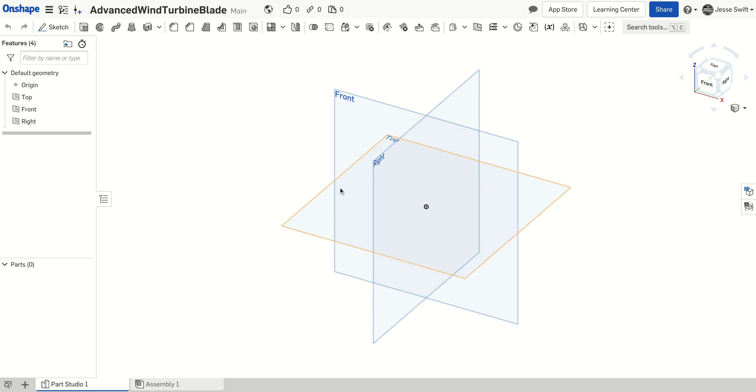Using my sketch from earlier in my brainstorm, I'm going to design a wind turbine blade that is around 200 millimeters long. Now, when you start drawing in Onshape, you'll click sketch, and it wants to know what plane you'd like to sketch in. Our first plane will be this front plane. We'll click there, and now you'll notice the tools have changed now that I am sketching.

So what we'll do with our advanced wind turbine blade is start with the shaft that will go into the hub on the generator. I'm going to grab my circle tool, and we're going to start that at the origin. I'll click and just draw a circle. Now that it's drawn, we can go through and dimension it accordingly to the size for the hub.

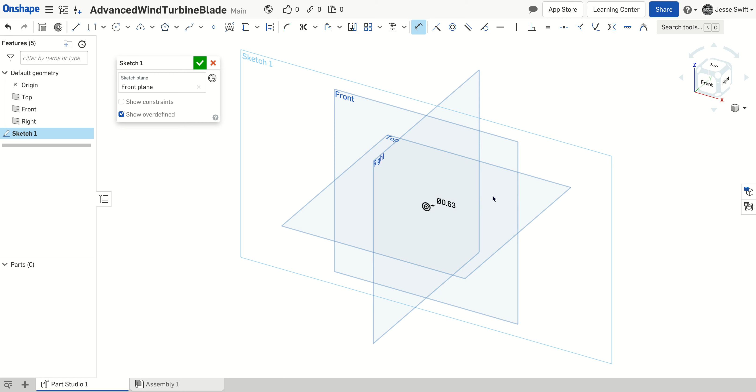It should be around a 1/4 inch dowel that would fit in the hub. So I'll grab my dimension tool up here, and we can make that a 1/4 inch. A 1/4 inch converted into millimeters is 6.3 millimeters, or 0.63 centimeters. So there's our circle for the shaft that will go in the hub.

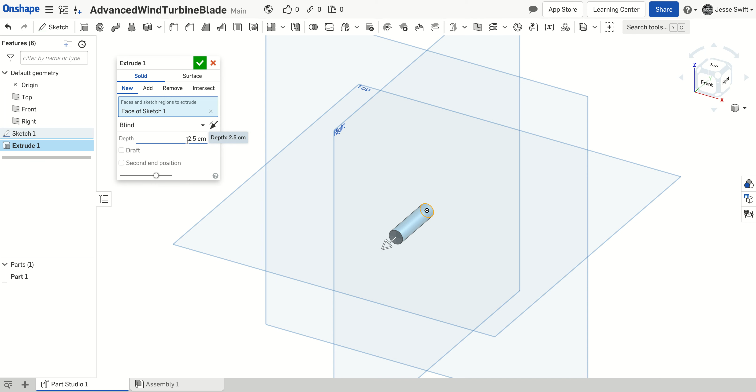Now that I've sketched it, I'm going to click on the green button and say OK. What we can do now is extrude it the distance we need for the shaft. So we're going to use another tool up here called extrude, and we'll click on that face of the circle, and then pick the distance to extrude. It's going to default to extrude 2.5 centimeters, and we'll just change that to 5, and we should get a nice 5 centimeter shaft there.

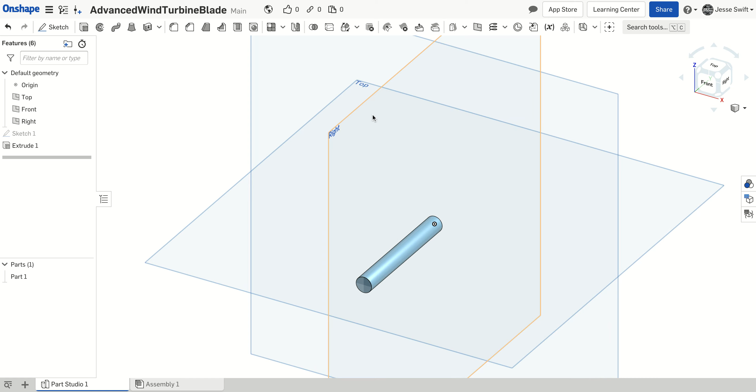All right, now this is one of the advanced functions here. We're going to click OK. Now what we're going to do is draw a profile of the blade that we want. In this profile, we're going to draw about 150 millimeters from our front plane, or 100 millimeters from this surface here.

So we're going to use a tool over here called plane, and what we can do is create a parallel plane to draw from. So we're going to offset the front plane, and we're going to offset that 15 centimeters. You can see out here that new plane has been created. Now that we have that new plane, we're okay with it, we'll click OK. And now we can change our point of view for our drawing surface to the front.

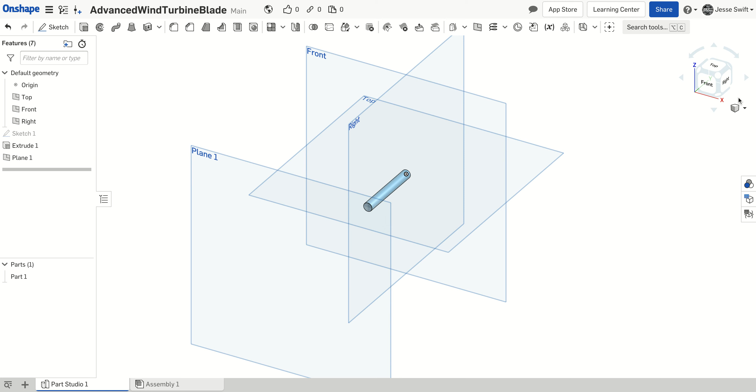You can see here, we can still see our shaft. And what we can do now is draw on this front plane. So I'll click on Sketch, we'll sketch on plane 1, and I'm going to change my view to front. This is where we can sketch this profile of our wind turbine blade. What I'd like to do here is draw some sort of wing shape, some sort of aerodynamic shape.

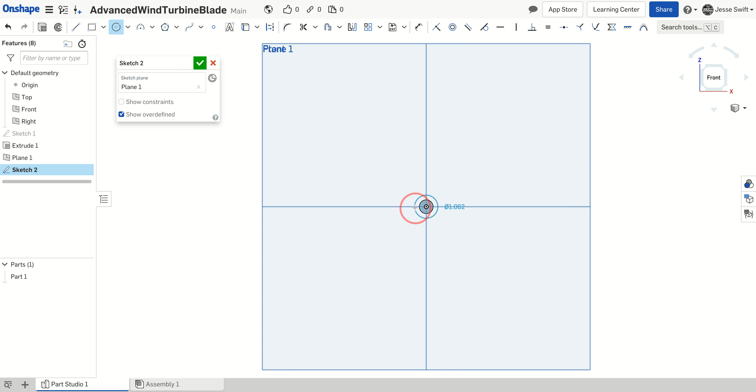So I'm going to grab my circle tool and make a circle just a little bit bigger than what we have currently. I'm going to scroll, zooming in. Now I want to take my spline tool and draw some curves onto this to make it look like an airplane wing. So up here at the top, I'm going to start my curve.

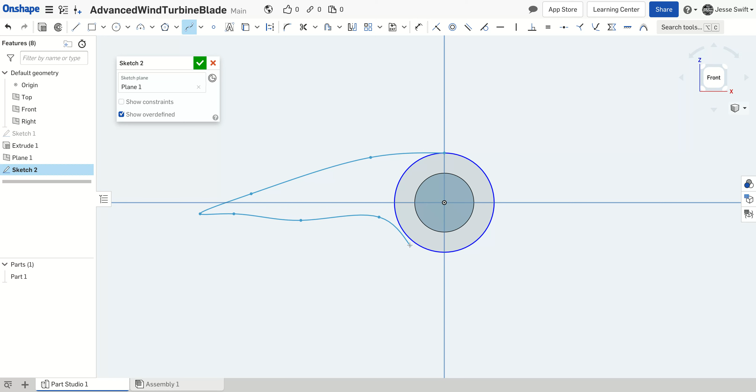I'm going to go out this direction, and then do a few quick lines here, give it a little bit of a cup, and end it tangent to that. So there's our profile that we want. If you're not happy with it, you can click on some of these points and change the shape.

To make it a little more aerodynamic if you like, what we need to do is trim this middle line off the circle. So I'll use the scissor tool and trim away that line. Now that we have that done, we'll click OK.

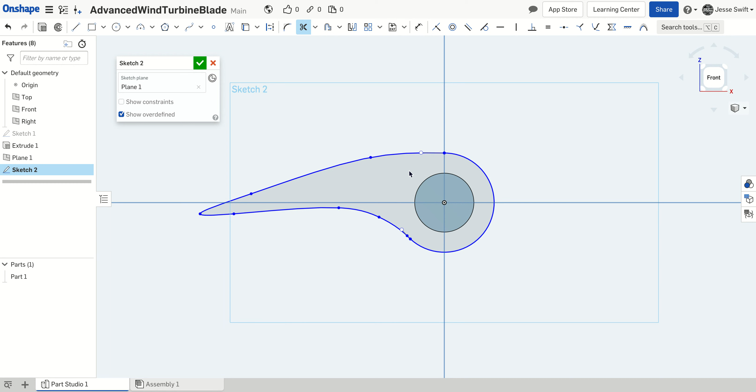Now I'm going to change my view again. I'm going to use this little diamond, and we're going to change it back to isometric.

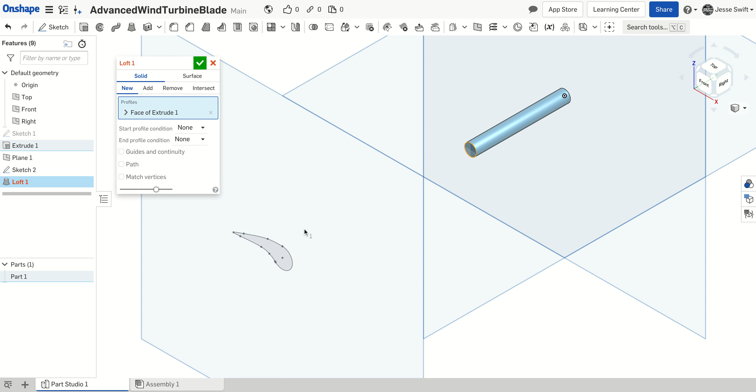Now this is the really cool tool that I'm excited to share with you. This function is called the loft function. What we'll do is click on the profile of the end of the shaft here, and then click on the profile of our wing. It will create that profile to go from a circle to our wing. I'm really happy with that, so I'll click OK, and we can scroll around and look at what that now looks like.

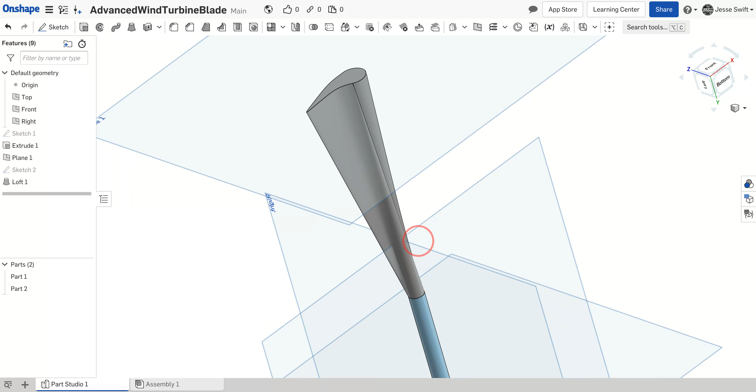So this is definitely a more advanced wind turbine blade. All right, I'm going to change that back to isometric.

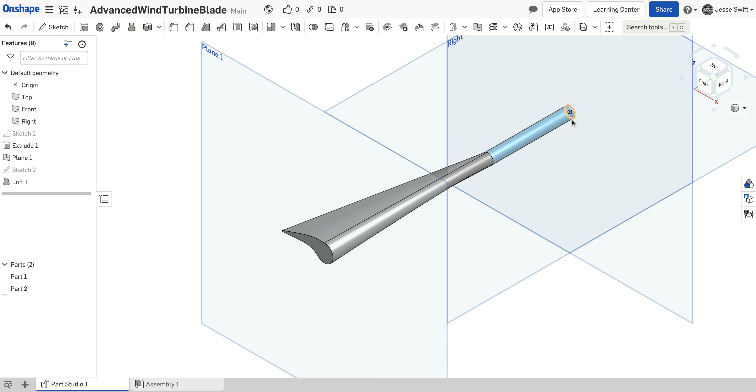Now I need to finish the blade because overall we have 50 millimeters here, we have 100 millimeters here, and I want to create another new plane that's another 50 millimeters from the end. So the overall length of our turbine blade is 200 millimeters.

So I'm going to click on plane, and we're going to offset. We can offset off of plane 1, and offset that 50 millimeters, or 5 centimeters. You can see now we've got that new plane for the end of our turbine blade. We're going to click OK.

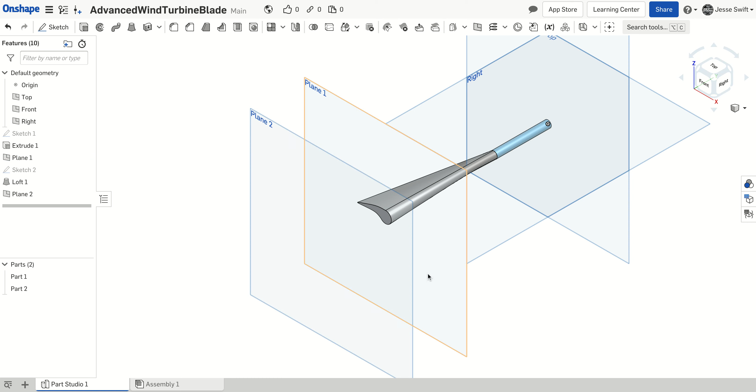I will now go ahead and sketch again in that plane 2. I'm going to change my view to look at the front, and now I'm going to just draw a small circle on that.

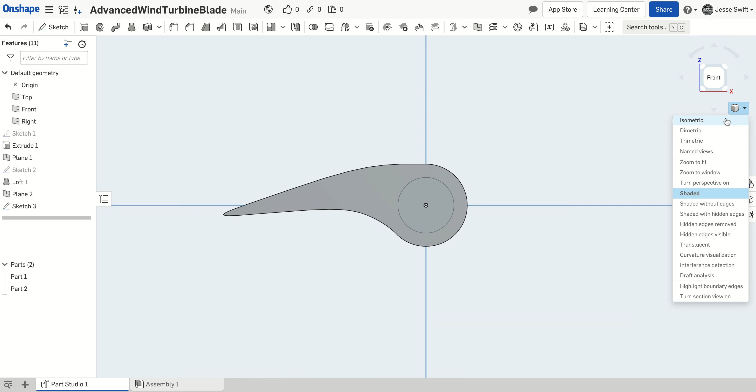And then click OK. From here, what we can do again is use that really cool loft tool, and we can loft from here down to the end of our circle. I kind of recommend ending your turbine blade in a circle instead of a point, just for the 3D printer and for the CAD work.

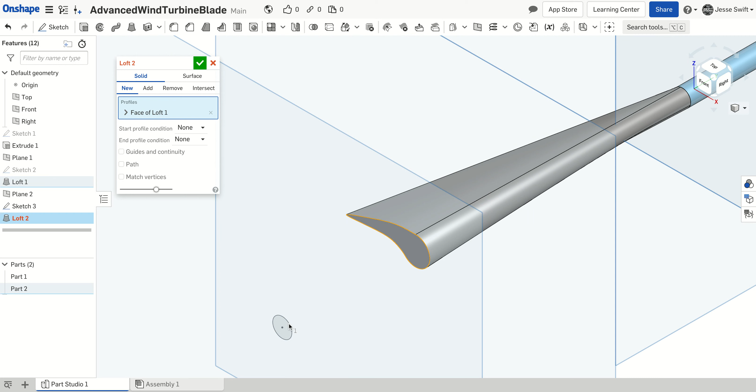So we'll use our loft tool again. We'll click on the surface of our turbine blade here, click on the surface at the end, and then we'll create that. And if I click OK, you can see that we have...

I'm going to zoom out a little bit. You can see that we have a really neat turbine blade that we've designed now. You can go through and put as many of these profiles in as you want. I have only 1, 2, 3 profiles with only one really big wing shape.

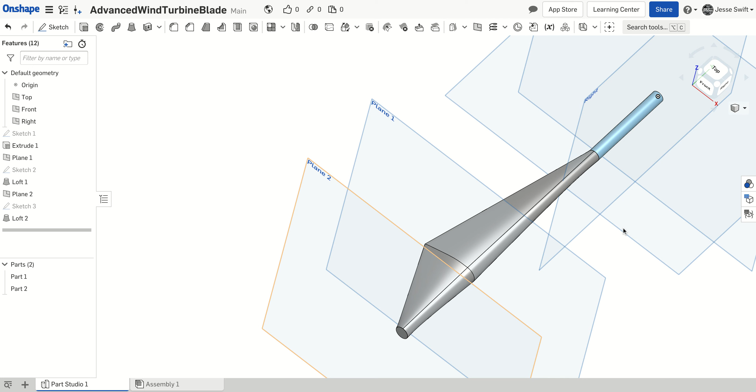If you wanted to, you could put several more within here and really make this an advanced looking turbine blade. Now that I'm done with that, the next step would be to prepare this file for 3D printing and export it as an STL.

Now, really quickly, if you want to go back and change any of the parts of your design, you can always come back here to your timeline, and you can click and double click on these steps along the way and make edits to those. And those edits will go through all of your parts.

So if you want to change your diameter here, you could, and it would change everything else from there. It's a really neat way to actually go back in time and edit what you've created if you're not happy with something that you've made.

All right, good luck, and I hope that you've come up with a really neat wind turbine blade that you're very happy with. My last step will be to rename this, and I'm going to put my name.